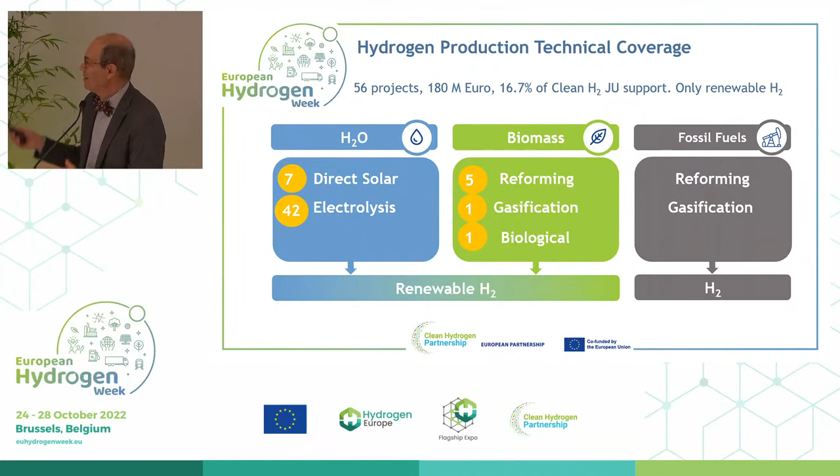Right, so hydrogen can be produced from water and can be produced from hydrocarbons, bio or fossil hydrocarbons. As you can see from the orange circles with the numbers there, we only support projects related to renewable hydrogen production. And the numbers clearly also show that electrolysis is the main technology that we are supporting. I have 3 slides with some statistics I would like to share with you.

This first slide, left-hand side, you can see the support we've been providing over the years for different types of electrolyzers, ever increasing, especially if you consider that in recent years, support is coming from other frameworks as well, like 90 million from the Green Deal. In the center, you can see the cumulative support, so PEM electrolyzers receiving most, followed by solid oxide and then alkaline.

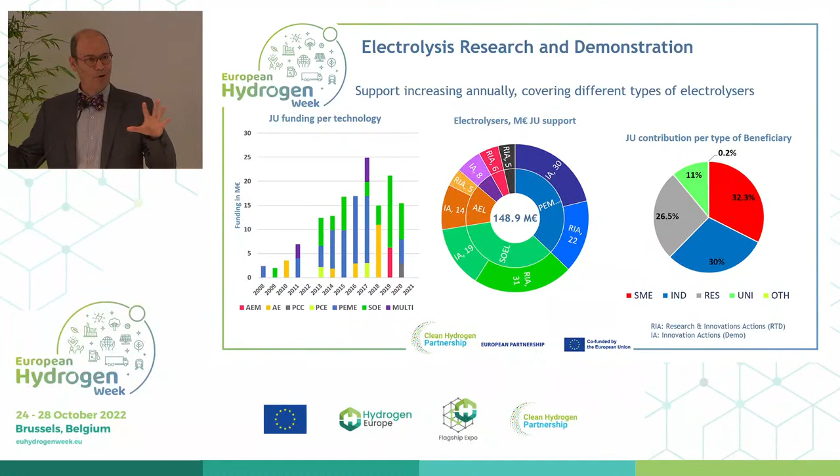And to the right-hand side, very interesting, how our funding for electrolyzers was distributed to the type of beneficiaries. The red is SMEs, blue is industry, heavy industry, and then more than a third went to research institutions and universities. There used to be a concern in the past that maybe a JU would be supporting industry mostly, but now you can see it's quite well balanced.

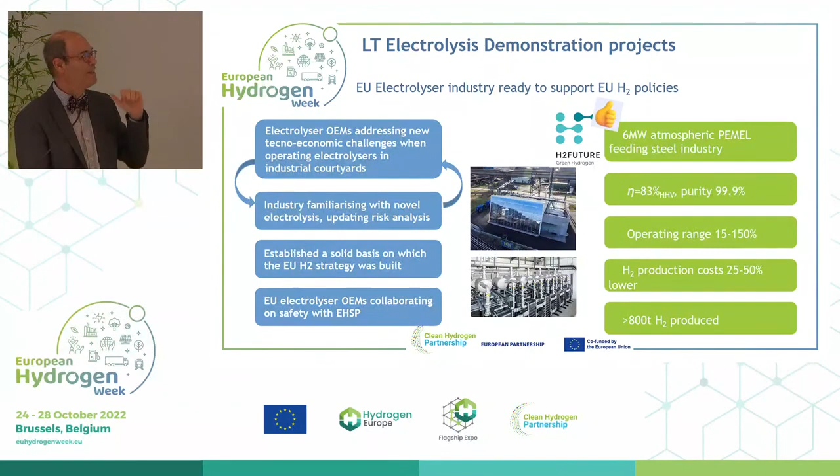They provided electricity balancing grid services, and they incorporated special software to foresee how costs would evolve to reduce the hydrogen cost down by 25 to 50% from operating normally. And they produced, over their testing, more than 800 tons of hydrogen. Besides all this, excellent outreach to the public, all the way to ministers, and the Commission really helped promote hydrogen in energy policy. So, from the project officer of the project, a thumbs up. This project is going to be dearly missed. Very, very good project. Excellent work also being done from our research projects, projects meeting the various targets.

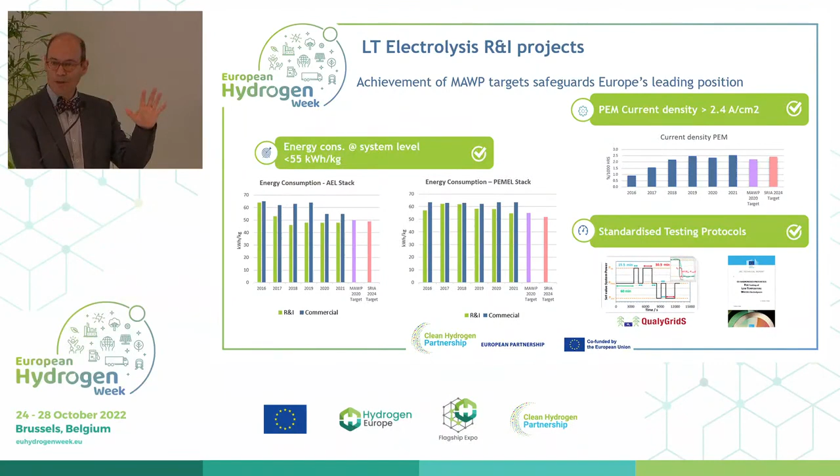On the left and bottom left, you can see the energy consumption at stack level for alkaline, to the right PEM for the research projects, and for the commercial electrolyzers that we use in the HRSs. You can see that our research projects are more efficient electrolyzers, especially for alkaline, compared to PEM, also showing the targets in the MAWP and the SRIA. At the right-hand side, it's current density. We're already there. The average is above 2.4 amps per square centimeter. At the bottom, we have supported the standardization of testing protocols for electrolyzers, project QualyGridS, but also the JRC effort already completed for low temperature. They're now working on high temperature testing.

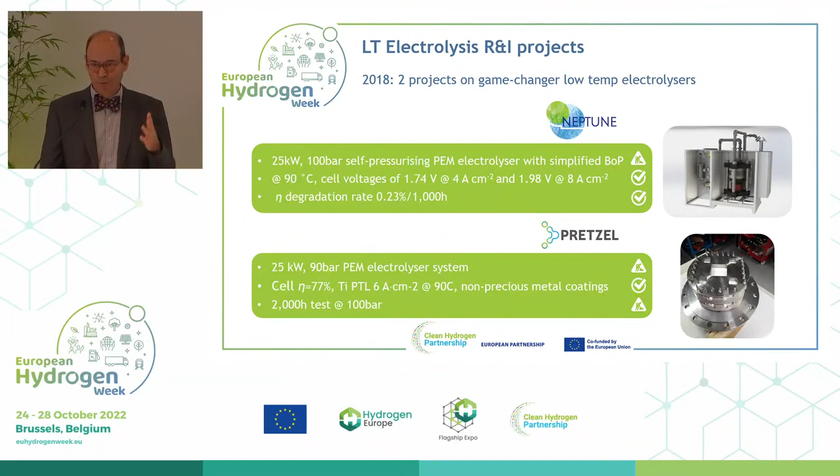A few examples of our projects: 2018 projects, game changers, projects Neptune and PRETZEL, aiming to develop 25 kilowatt 100 bar electrolyzers, quite challenging. The projects really struggled, I have to admit. They managed to develop cells that went up to 4 amps, even 8 amps per square centimeter for Neptune. PRETZEL, 6 amps, so very impressive figures, but indeed challenging. And indeed, currently, we had a topic on highly pressurized operation of electrolyzers that was aiming for 50 to 80 bar, and we have 2 projects that were successful and are currently in the process of signature.

2019, 3 projects running in parallel supporting research on anion exchange membrane electrolyzers. Projects are getting there. They've developed hydrogen and oxygen evolution catalysts. They're now moving into testing these functional materials. They have jointly developed testing protocols for anion exchange membrane electrolyzers and also a hub on the internet for information. And yesterday, for those who were there, Project NEWELY received our Best Innovation Award. Congratulations to them.

The most recent effort we have is Project Oyster. This is a 1 megawatt PEM electrolyzer being designed for marine offshore applications. For the time being, this is going to be near shore at a port. It's also going to be designed to do wind turbine following, and it will have an integrated desalination unit. I'm also mentioning Project HyPSTER. It's basically hydrogen underground storage. You'll be hearing from my colleague later on this, but it has an electrolysis component. There's a 1 megawatt electrolyzer there.

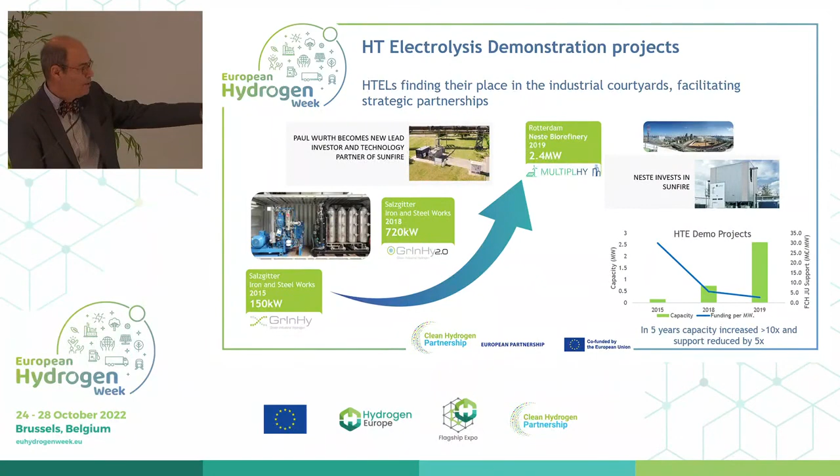Moving on to high temperature electrolyzers, similar trend, growing from Project GrInHy2.0 to MULTIPLHY. We are moving to the megawatt scale for solid oxide electrolyzers, with similar trends in decreasing cost and increasing capacity. The feedback loop on the left is the same. I'd like to make special mention to Project GrInHy2.0, which achieved very high efficiency with heat input of 6.5 kilowatt hours per kilogram, and high current densities. This consortium did a fantastic job, as GrInHy2.0 are the only projects I know that were completed on time and met their targets. It's rare, so another thumbs up from project officers.

A lot of research work is being done: Project Gamer, and proton ceramic electrolyzers in Project Reflex, which met various targets at the component level, and now it's at the last stage of incorporating everything into a system.

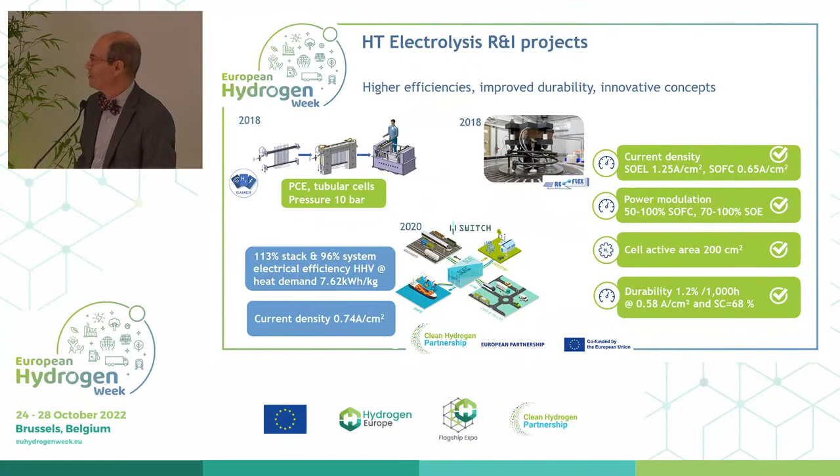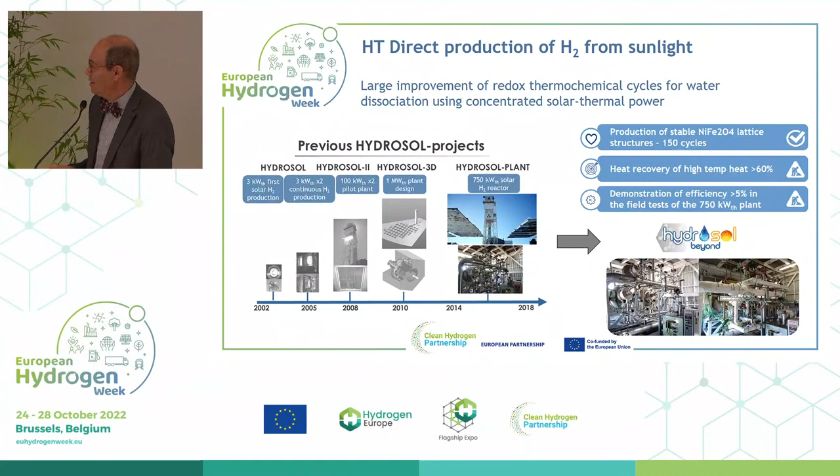There is also low temperature hydrogen production from sunlight, the photoelectrochemical devices. We've supported these to go up to 10 square meters under the sun, and this topic will be featured soon in our next calls for proposals.

The last slide covers producing hydrogen from hydrocarbons, either biomass or biogas. On the left-hand side, our projects are quite old, completed some time ago - gasification of dry biomass or wet biomass and fermentation. There will most probably be a topic on this, a flagship project for hydrogen production from waste at quite a large scale. To the right-hand side, we focused on biogas without prior CO2 removal, producing hydrogen from biogas in Project Bionico, and Biorobur Plus.

In conclusion, our research and electrolyzer projects show that the best-in-class electrolyzers have met even the 2024 KPIs. But please note, not all the KPIs at the same time - so you meet some of the KPIs, and you have to sacrifice some of the others. So there is work to be done.

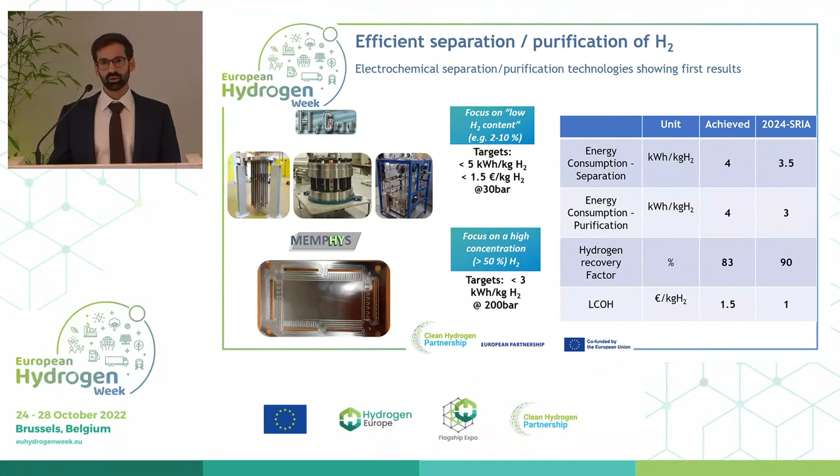On to compression, which is a key part of the distribution chain. It is very important, almost like the star football player of the team that is most of the time injured. This is what we're trying to solve. We have indications that 40% of the downtime in a hydrogen refueling station is due to a failure of the compression. So in our projects, we're trying to improve availability, efficiency, and the capex of the compressor.

We have a series of projects called COSMHYC, where we're looking at a hybrid compressor, a containerized solution, where the low pressure part of the compression is taken care of by the metal hydride solution, and the high pressure range is taken care of by the mechanical compressor. We can already see good results in terms of the absorption capacity improved for the metal hydride part, and the reduction of capex for the mechanical compression, along with increased flow rates. The idea is to have it tested in a fully real-life environment in order to refuel 2 tons per day of hydrogen.

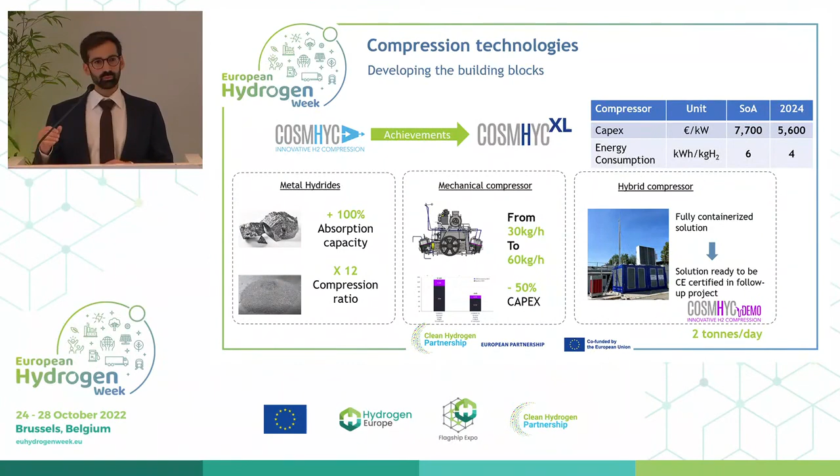So, on to hydrogen carriers. We've had already 2 projects on liquid organic hydrogen carriers. This solution is very promising according to several studies for very large transportation distances, and that's one of the reasons we're looking at it. We've already had a proof of concept with Project HySTOC, and you can see the 2 pictures on the left: one is for the storage unit where we bond the hydrogen into the liquid, and the other is for the release where we remove hydrogen at the end-use site.

It has already been demonstrated for 2,000 hours of testing, showing good results in terms of purity of hydrogen, and we will continue to support this in our call. We have 2 topics in the call that is closed now, one for liquid organic hydrogen carriers and another for ammonia.

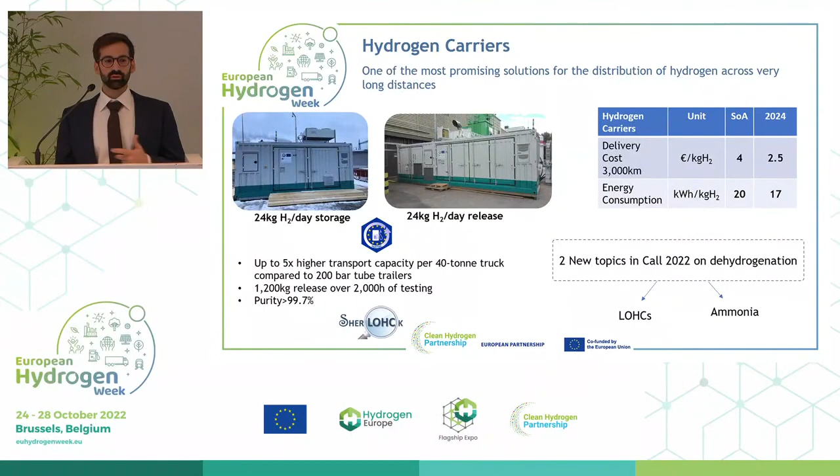Finally, as I mentioned, there are several modes of transport of hydrogen available, each with their own merits and disadvantages, and we're looking into most of them. Even though we already have commercially available gas tube trailer solutions, we're trying to increase their pressure range to improve their capacity, reduce the amount of trips necessary to refuel stations, and reduce overall the cost of hydrogen delivered.

And then, as I mentioned, for the first time in our program, we're really looking into liquid hydrogen infrastructure, where we're developing a large-scale tank solution for the shipment of hydrogen through the maritime sector. Our overall targets there are to go to sizes of up to 350 tons and keep the boil-off rate rather low, to 0.5% per day. This will be tested in a downscale prototype of 10 tons as part of the project.

And in order to produce the hydrogen necessary for all this, we're also having a topic on improving hydrogen liquefaction, improving the energy consumption of the process and overall the cost.

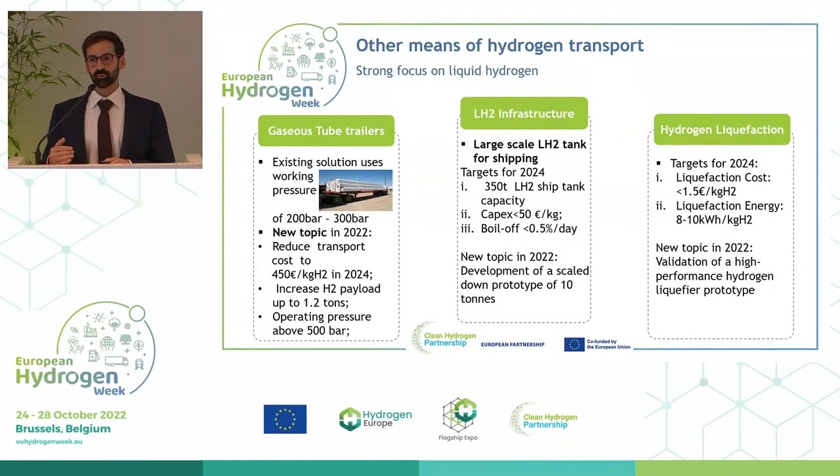In summary, some key points to take with you: we've had several projects on underground storage, which are gaining a prominent role in the partnership, and the first demonstrations are starting now. On the distribution side, small-scale demonstration on hydrogen injection in the gas grid is already taking place, and we'll be looking further into the compatibility and repurposing to 100% H2.

On the compression side, we have innovative solutions scaling up, and the next step, of course, is to test them in real-life conditions. On hydrogen carriers, we had the first proof of concept on liquid organic hydrogen carriers, and our next priority is to also step up the infrastructure on liquid H2.

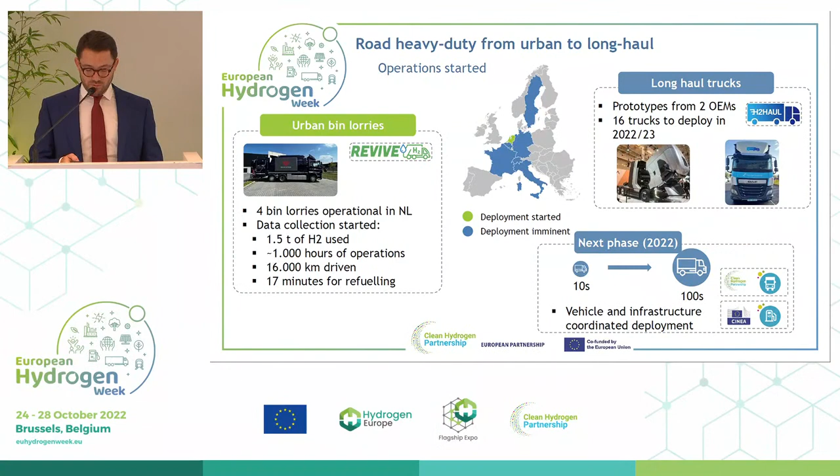I move now to the maritime. Let's change the atmosphere. Let's sail a bit. A sector that has increased quite fast over the time and getting bigger and bigger. Look at the upper part for the maritime. We went from 0.16 megawatts in a small vessel to up to fuel cells of 3 megawatts. And because there is no one-size-fits-all, there are different needs of power, of autonomy of these ships. Therefore, we've been looking at different types of fuel cells, SOFC as well as PEM, and different types of fuels. Hydrogen, be it gaseous or liquid, and as well as ammonia.

Unfortunately, today, there are no regulations, no rules that tell you if you'd like to do a hydrogen ship, this is the way to do it. So all these ships have to go through an alternative design process, which is lengthy, it costs more money, and is subject to interpretation. Therefore, we do have the project E-Ships looking at pre-normative research, helping the International Maritime Organization to develop guidelines for the use of hydrogen as a maritime fuel.

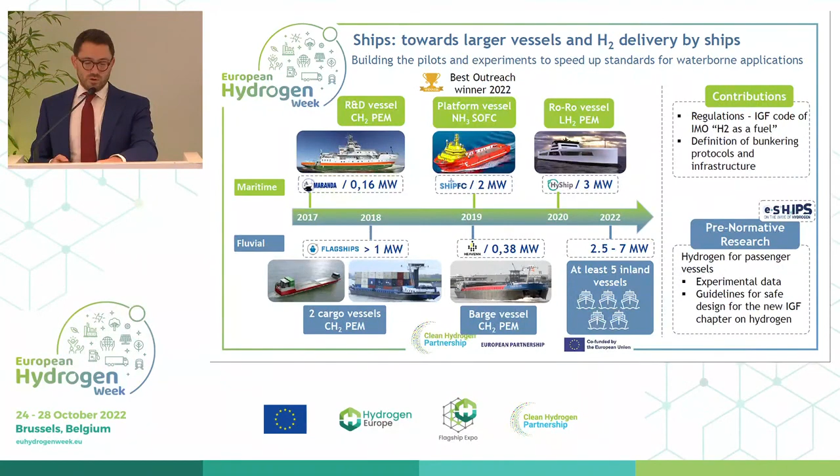In the fluvial, bottom part of the graph, there the ambition is not on the power of the fuel cell, but it's to develop a fluvial corridor for use of barges. These ships, at some point, will have to stop. They stop at a port. In the port, they still have to operate. And in order to provide clean operation, there are 3 fuel cells used in a stationary manner to provide heat and electricity in the port of Palma, Orkney, and Tenerife, as well as in Valencia.

3 equipment to handle containers, to load and unload the container ships, will be deployed early 2023. So it's a yard tractor and a reach stacker in the port of Valencia. This is for the hardware. Then on the software, we have a study looking at the importance of ports in a hydrogen economy, where hydrogen will be imported from other continents to Europe. What is the demand for this hydrogen at different time horizons, 2030, 2040, 2050, and how to match this demand with the supply. The side objective of this study is to generate a community, so there is a network of hydrogen European ports.

Trains. One project, FCH2RAIL. The goal is very simple. It's a bi-mode fuel cell running together with the battery pack. Both specifications on the battery and the fuel cell have been made, tested on bench, integrated on board the locomotive, and now the locomotive is on the rail being tested in Portugal and in Spain. The other activity of this project is to look at homologation and identify normative gaps.

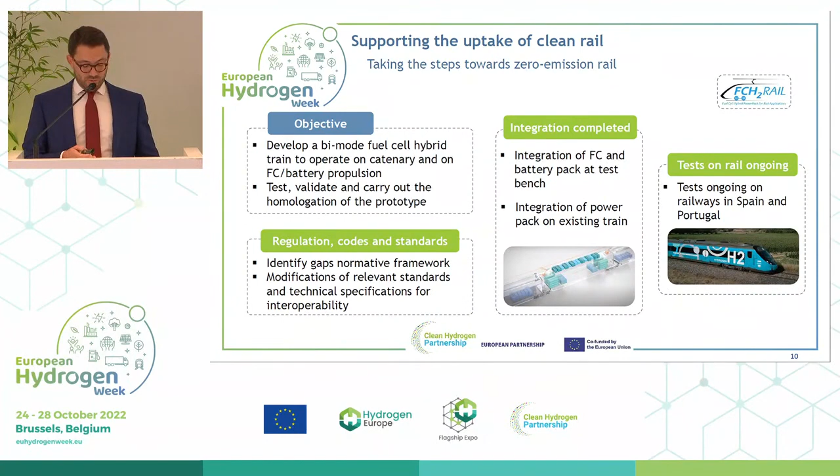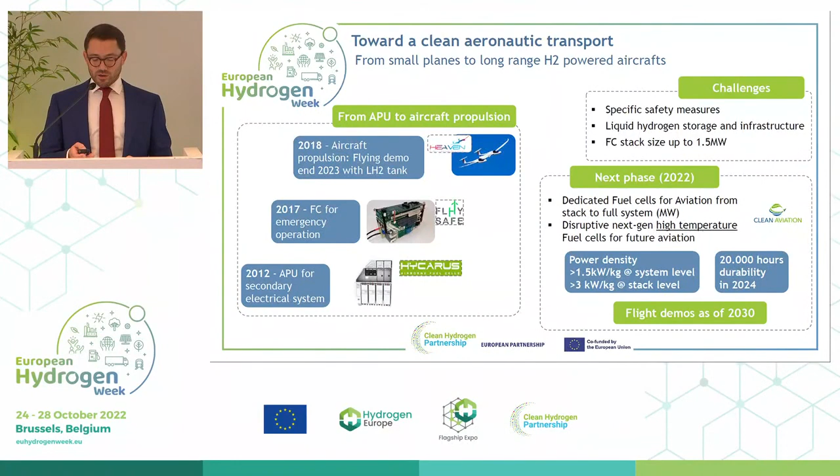Aeronautics is a crucial sector in Europe. We do have leadership. This leadership must be kept. In synergy with Clean Aviation JU, the ambition is to have a flight demo as early as 2030. This is why, in a new phase from the call for proposals 2022, we have launched topics on how to increase the size of the fuel cells from kilowatts to megawatts, and include as well a new generation of fuel cells for aeronautics. That's it for the different transport modes.

Now I move into the building blocks. So on the fuel cell stacks, the components, the balance of plant, we will continue the support. It's needed for the different transport modes. Manufacturing, integration of the sustainability aspect. For the hydrogen tanks, how to optimize the space by using serpentine, if you want, conformable tanks. And for the infrastructure, it's improving the efficiency of the delivery, because now it's a network of HRSs that need to be monitored and managed.

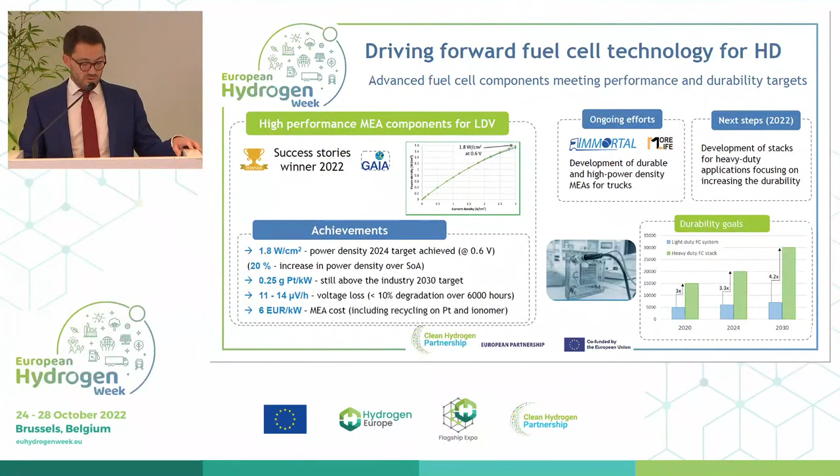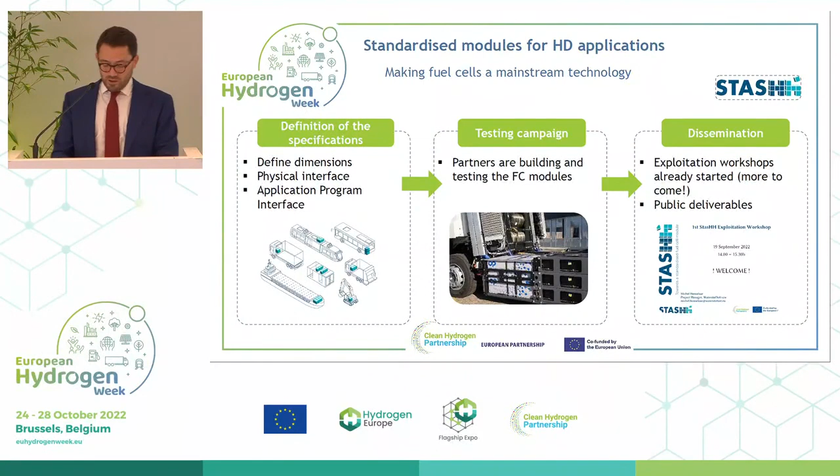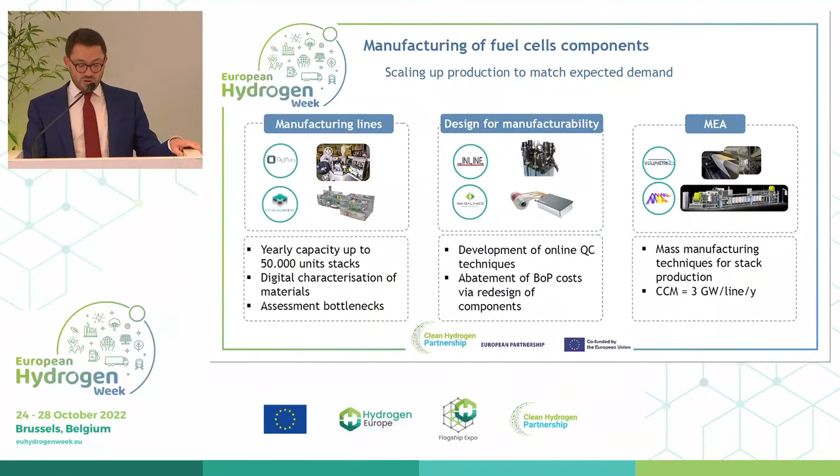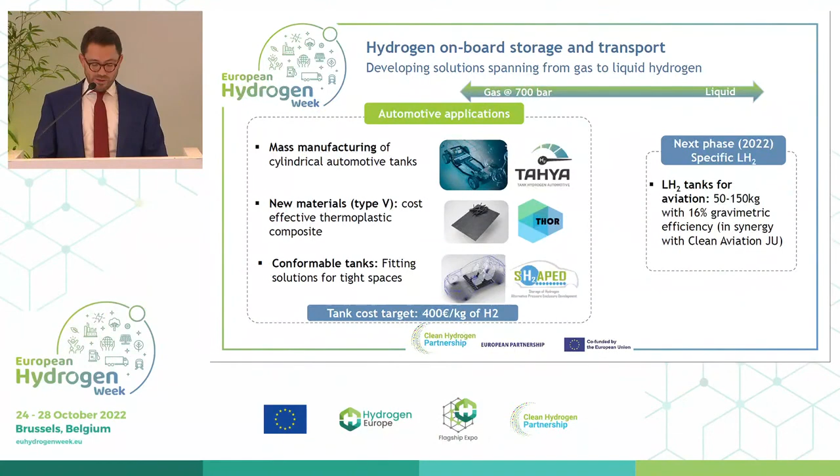And to reduce the cost: these tanks are still expensive. How can we produce them better, faster, cheaper? That's the objective of TAHYA. Next phase, for the aeronautics, very specific, the tanks of liquid hydrogen that are lightweight and can fly in the air. Hydrogen refueling station, this will be my closing chapter if you want.

From this shift, going from automotive to the heavy duty for the trucks. Today, a standard exists, SAE J2601, to refuel your car with 5 kilograms of hydrogen in 5 minutes, more or less. But if you apply the same flow, same speed for the trucks that have tanks of 80 or 100 kilograms of hydrogen, it will last quite a long time. So we need to define new standards in order to speed up that refueling. Well, this is what the project PRHYDE has been looking at, to improve, depending on the technology on board a truck and the technology within an HRS, how to optimize that and not do a refuel at the default speed.

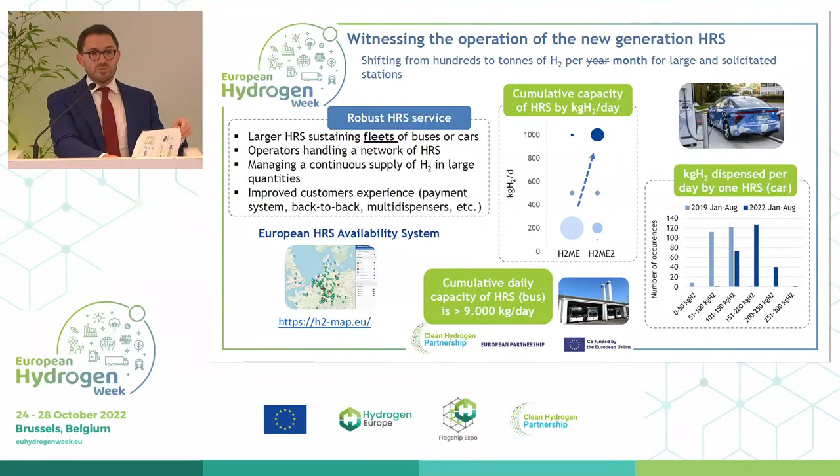So for the HRS owner, operator, it's a full business, a fleet, a network of HRS to manage, to do delivery in city centers. This is where the taxis are usually. And you need to match the functioning of the HRS with the expectation of the taxi drivers. So how it will pay, you cannot say, no, my station is broken. I'm now reaching my conclusion.

On the early projects for the buses and for the cars, we do collect the data and get interesting feedback, reaching out to new markets. For the trucks, everything is there. We paved the way for this truck arrival on the building blocks, on the infrastructure, and on the testing of the trucks themselves. For the heavy machinery, heavy duty, again, we are preparing the different markets, trying what could work. For the R&D, continuous support on the building blocks, increasing the power density and the durability of the PEM fuel cell.

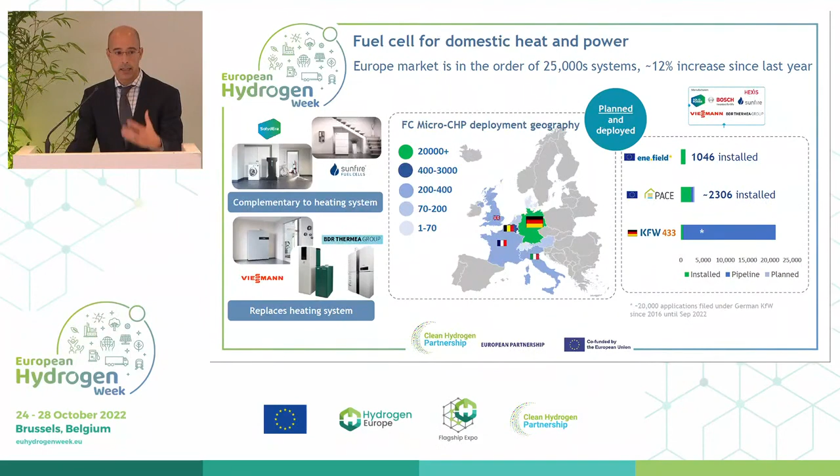And very important as well, the support that has been given or is being given in Germany, which has helped to create much larger numbers of units installed. In our project PACE, which is still ongoing, we are targeting close to 3,000 units. We have seen 2,300 units installed, but the KfW 433 scheme in Germany is helping and has developed the market now to the order of 20,000 units in Germany.

So we have a lot of data, we have a lot of experience gathered, more than 26 million hours of operation gathered in our projects. We have units installed throughout Europe. It's very important that in the early phases, the projects allowed the manufacturers to have the confidence to go and develop manufacturing processes for volume manufacturing, and now a number of the OEMs are able to produce more than 2,000 units per year.

And we were talking about when we will see if these durabilities of the stacks, for instance, are being met. Well, I think now we can say that, because we have units that have run in the field for more than 40,000 hours. So we can now say with confidence that targets of durability at the stack level have been achieved. Efficiency was already done several years ago. We have a whole range of technologies, but we see power efficiencies reaching 63% in operational data here.

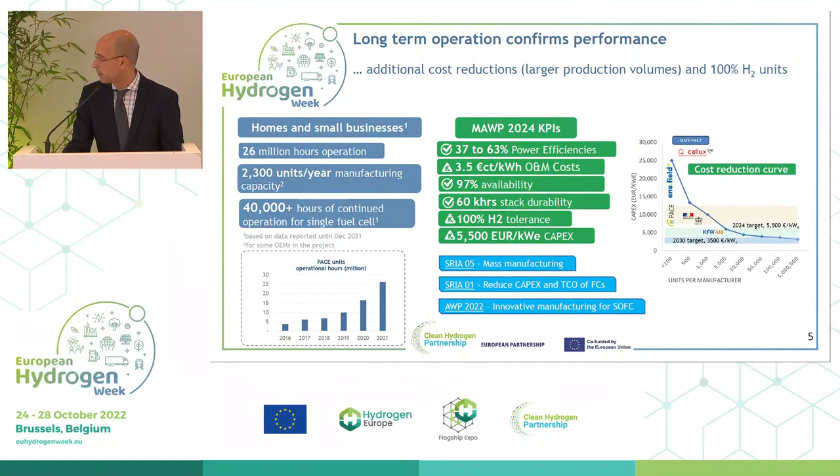And then, yes, we may still need to do some work on the CapEx, but CapEx has decreased considerably. This is why we will continue in the Clean Hydrogen Partnership to support activities aiming to reduce the cost of the fuel cells, importantly also through innovative manufacturing processes. But we still continue working on the next generation.

We heard yesterday that we will have a lot of hydrogen produced, and we need to use it. But it's not only about hydrogen, it's also about other renewable fuels. So this next generation of products, these projects are working precisely on that, to develop systems that are flexible to the type of fuel that they can use. We have a number of ongoing projects, and we hope to be able to present specific results next year.

One of them is looking at solid oxide fuel cells, developing technology that can run on any type of mixture, whether it's natural gas, biogas, or, looking ahead, hydrogen. Another one is looking at developing cost-effective technologies to clean biogas so that it is suitable for fuel cells. And we also have another line of work on a high-temperature fuel cell that will run on methanol. These are small prototypes and research projects, but they are also looking at applications in the 100 kilowatt range once scaled up. So we are also developing technology that could, for instance, be suitable for maritime applications.

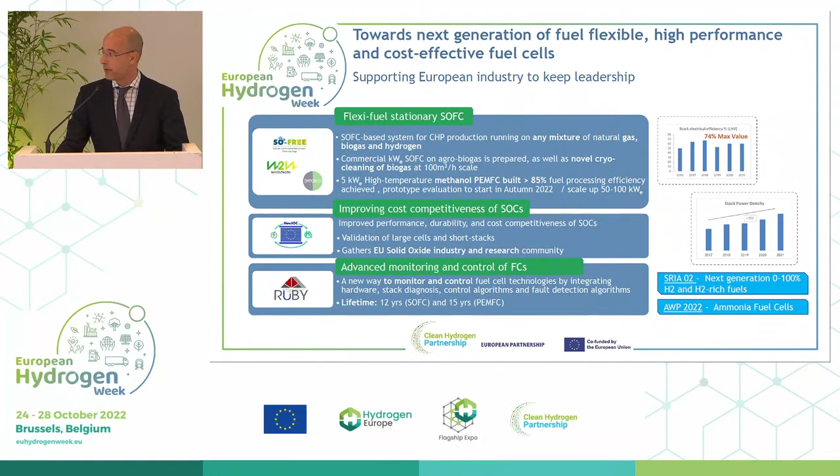We have done a lot of work as well on monitoring and controls. We have supported a large number of research projects, and now we are glad to see a project that is taking the tools developed to improve the lifetimes of systems and testing them on real units in the field. We will continue doing that. It's a very important objective of our current SRIA to work on units that are able to be an important part of the energy transition, in which we will have scenarios with hydrogen and other hydrogen-rich fuels, and this is what we are going to focus on, giving continuity to these activities.

Now we move to larger applications. If we look at applications for commercial buildings, for the service sector, we have a similar story: a number of feedback loops, proofs of concept and early trials that have now helped to develop and finalize designs of the next generation of systems. Here we have a project, the ComSos project, which will be presented later in detail, which is looking at installing around 450 kilowatts total capacity of sub-100 kilowatt systems. The designs are finalized, and 9 systems have been installed. Some of them are already starting to provide data, and we still have 10 systems to be installed.

We have reached the KPIs in the efficiencies. You can see that stack durabilities are only increasing. Good availability, which is key, especially if you are an end user wanting to use this technology. Again, we need to do a bit more on the cost, and we will provide support for that in the current joint undertaking. And when we talk about hydrogen tolerance, we have units that are now able to cope with 100% hydrogen in methane, in gas, and we hope to see those units taking more of that.

A very nice project started about a year ago: high power density solid oxide fuel cells for a very specific application in data centers. We hope to have results soon, and this is a niche, or not so niche, application that we will be supporting.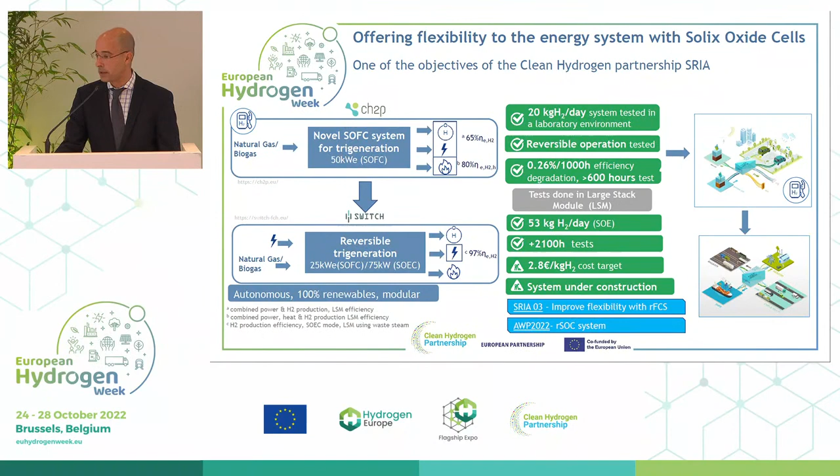These activities will continue. In AWP2022, we actually have a project that will look also at the energy grid integration of those systems, by looking at how they can be integrated directly into the gas and electrical grids.

Great project as well, looking at portable generation with hydrogen. This is the Everywhere project. The project has developed an approach where two containers are used: one has the hydrogen bundles, the other has the fuel cell and all the balance of plant and management system that is needed.

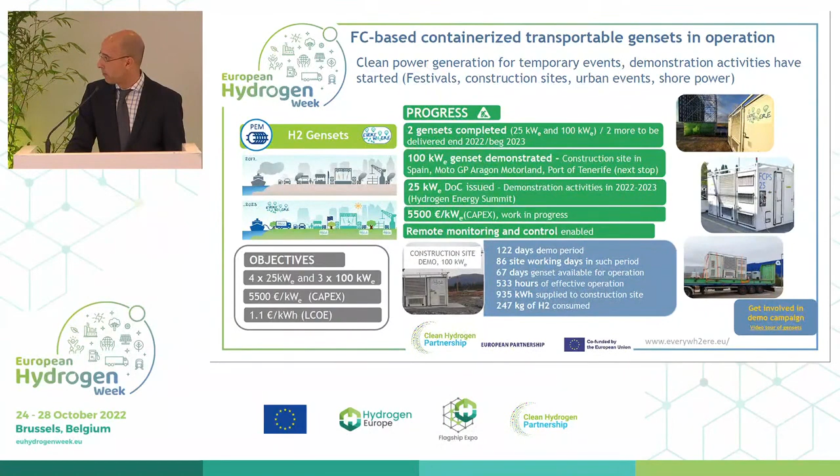The smaller genset, 25 kilowatts, is also being developed, and demonstration activities are currently ongoing.

Finally, the last application is about the use of hydrogen in industry to produce power. Of course, there is the possibility to also recover the heat. Already many years ago, we installed a 2 megawatt system in China.

That was really the very first generation of this system, and this is another example of that feedback loop I mentioned before. The unit was run, there were experiences, there were things that, of course, could be done in a different manner. So some years ago, we started to support the next generation of systems applicable to the megawatt and above scale for industrial purposes.

We did it through the Grasshopper project that developed a 100 kilowatt prototype. The project has ended already, and you will hear the details later on. We have achieved on efficiency, CapEx, and stack durability - if you look at the projections of that prototype, the targets of 2024 - and the project has been working at all levels.

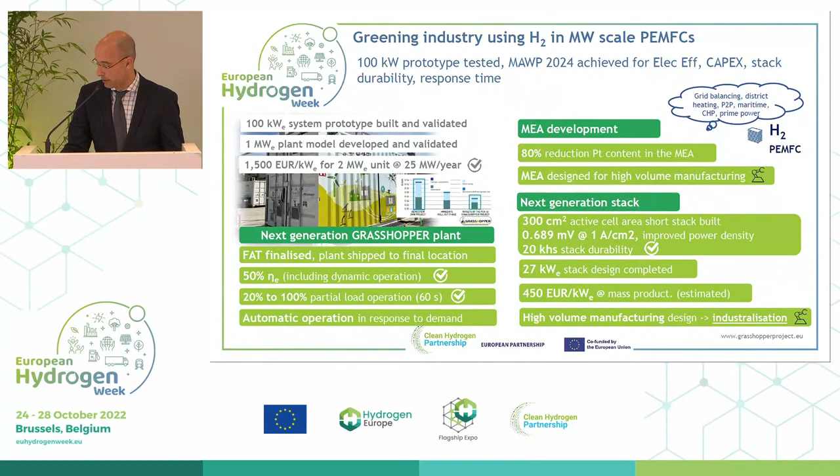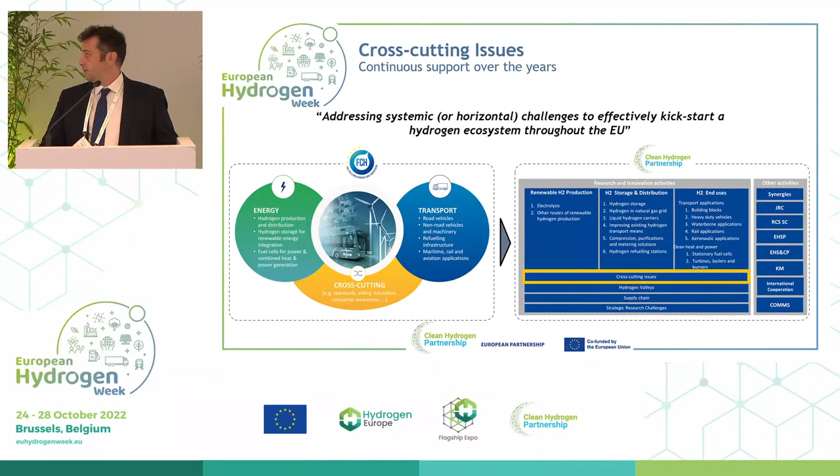Previously this was the third research area within the program. Within the Clean Hydrogen Partnership it is one of the four horizontal areas in which we will continue supporting grants and research and innovation activities. We will continue supporting activities in three main lines.

One, sustainability and circularity aspects. The second, education and public awareness. And the third, safety, pre-normative research, and regulation, codes and standards. All these activities will be mainly conducted through grants and projects, with strong links to other activities, as Mirela presented this morning - the collaboration with the Joint Research Center, the regulation codes and standards strategy coordination, the safety panel, and the sustainability and circularity safety panel that we are going to set up very soon.

So far, we have been supporting 46 projects with a total funding of 65 million, involving more than 70 countries within all these projects.

So let's have a look at the first area, sustainability and circularity. We have supported so far 6 projects with funding of almost 6 million, involving 10 countries. In this sense, of course, the technology needs to have reduced cost and improved performance, but we also have to ensure that it's environmentally friendly, sustainable, and circular.

We have been supporting projects like FC-HyGuide, developing life cycle assessment guidelines to provide guidance on how to assess the environmental impacts of these technologies.